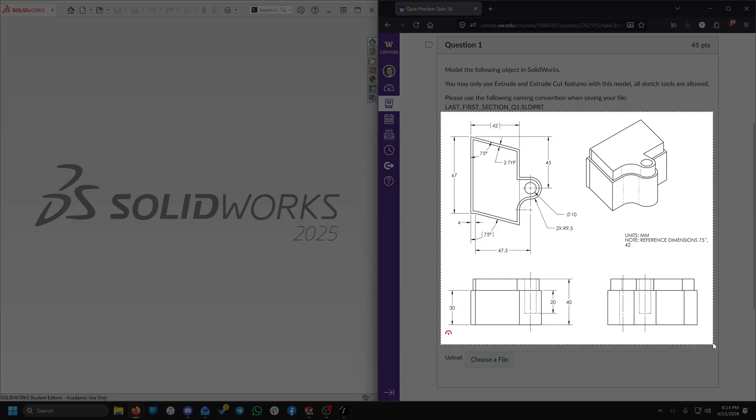And as far as the actual quiz itself goes, when y'all are taking it, it's going to be handed out on a paper sheet, so you'll be able to just do crossings there. However, so that everything remains on the screen, I'm just going to use the snip tool so that we've got our little doodle space as well. Oop, that is a bit much. There we go. Awesome. We'll probably use the highlighters, you can still read it.

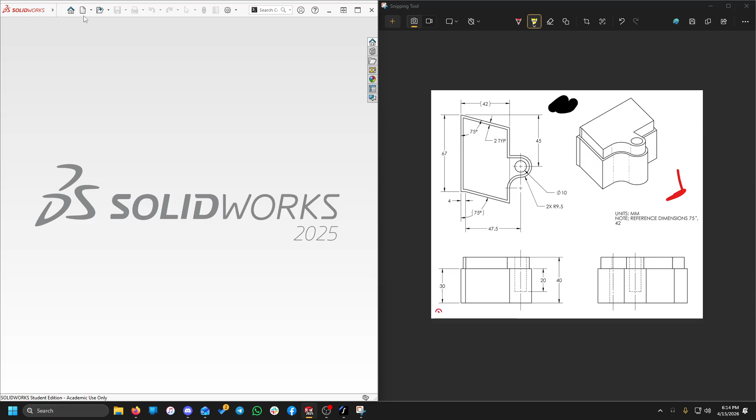But anyway, when you first get set up in the classroom for the quiz, I recommend you get SOLIDWORKS open, get a new file open, and then we have our units set. So on the front of the quiz handout, there's going to be a little thing specifying the units. It's either going to be inches or millimeters, and we can set that with the little drop-up menu down at the bottom right. This one is in millimeters, so mm. Cool. Alright, so got our file, got our drawing.

Let's see. Usually, a good place to start is to consider what feature we might want to do first. So anything that's got a majority of the geometry going on is generally a good spot. See in the top view, that's where we've got a lot of our dimensions, and they describe the profile of this base feature that we have here. So we've got some outer extrude that's taking up the majority of our space, and then we've got an offset inner extrude and an extrude cut for this little circular hole here on the right side.

So we're probably going to want to create this starting on the top plane. We'll draw the outer outline of it first, create our extrude. Then we can do an offset entities to get this inner loop, similar to the easier method for approaching a similar shape on the first homework assignment. And then we are going to do the extrude cut last, because we see this hole goes through both of these stacks of material.

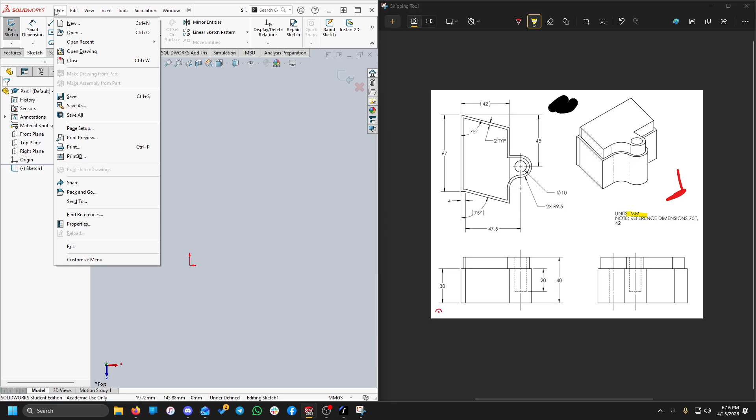So, beginning by creating ourselves a new sketch. This one's going to be on the top plane to make sure that our orientation matches. And as far as origin locations, there isn't really any specific point that would benefit from having the origin there, so we'll just have it in the bottom left. Makes sense. And start by drawing in our outline. So we've got a vertical straight line. Then we've got a little diagonal going down to the right. Then another vertical over here. Horizontal to go over. Then we've got this tangent arc, so it connects in smoothly on that side.

So we can do the auto transition feature by bringing the cursor back to where we started that line, and then tracing out a little bit of a circle, and then clicking down here. And then we see we've got another arc, so it connects in smoothly from there to there, and we do see that we've got these gray tangent edges in our isometric, indicating that those do in fact have a nice smooth connection between the geometries.

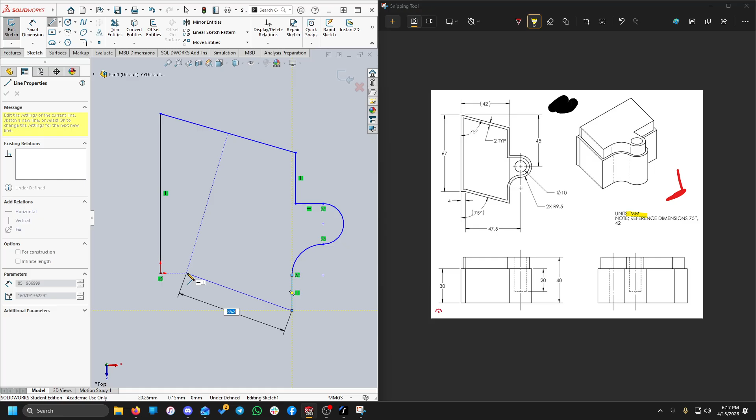And then we've got our final arc here. Little vertical line segment down there. Another diagonal. Looks like that brings us close to the beginning, but not quite. And then a horizontal to close it off. So we've got now a fully closed shape. So all's good so far.

And then we just need to throw some numbers at it. So looking this one over, we see that we've got 67 units on the left side, so we'll dimension this one there. Then we've got cross that out. I guess also because it's going to bug me if I don't.

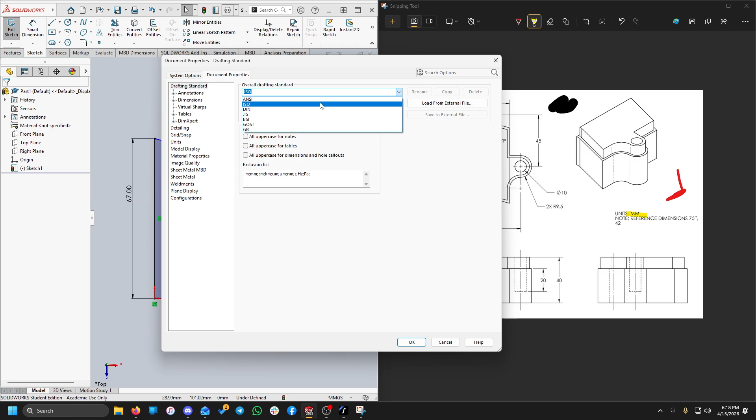We can change this from the ISO drafting standard to the ANSI drafting standard. So this is through the little options gear up in the top. Under document properties, for whatever reason, the default ANSI in SOLIDWORKS 2025 is set to the ISO perspective for this. So if we change it to ISO and then change it back to ANSI, that fixes it. I don't know why, but we're just going to go with it.

Anyway, we've got our 42 dimension up here, but this one's in parentheses, so that tells us that this dimension is a reference dimension, so we can't use it directly. We're just going to have to hope that as we hit the rest of our dimensions, everything kind of comes together. So, from there, got this 75-degree angle. So we can measure an angle just by selecting two non-parallel lines, and it'll allow us to get the angle between them.

Then we've got 45 units from the top corner of our object down to the center of our arc. So that's going to be from that point to that point. And we want to make sure that we're being very careful that we're measuring the height here, not the distance. So it's explicitly from there vertical. 45.

Cross that one off. Then we've got a 2x R9.5 indicating these two arcs. So with those, we know one of them needs to be dimensioned, so we'll dimension this top one first, 9.5, and then the 2x tells us that there's another arc that uses that same dimension. So that's probably going to be this one that is connected with over here, since that's the only other sort of arc in the area. Another potential thought could be that it would be this one on the inner loop, but that isn't really something that we would be able to use here. So it's going to need to be this outer one.

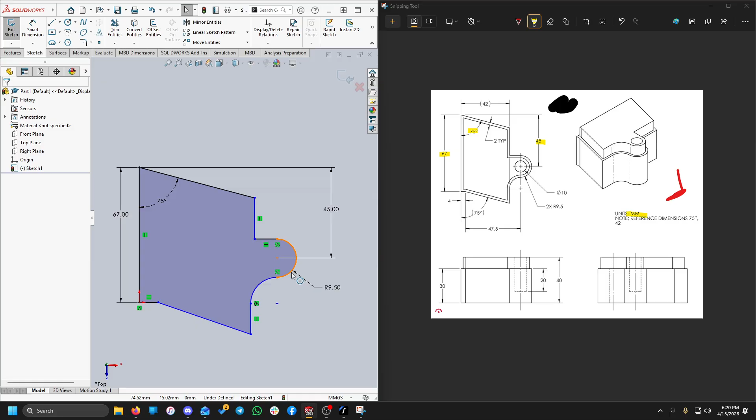And to get it so that this one dimension is affecting both of these arcs, we're going to need to use the equals relation. So we can select the one, hold down shift, select the other, and equals. You might need to hit escape a few times when you're first doing that, depending on if you had any other tools selected, but that does get that set up for us.

2x 9.5. Another thing that we can notice while we're here is that the center marks for these two arcs are vertically aligned with each other in the drawing. So we've got one of the extension lines actually connects between the two. So I'll just grab those 2 points in the middle, apply a vertical, and that sort of sets those up to match up nicely.

Another thing that we can notice regarding our geometric relations is that we have a little guideline showing us that this top vertical edge stays lined up with the bottom vertical edge. So these two lines are going to need to be collinear with each other. Same song and dance as before, hold down shift, select the both, and we can apply a collinear relation.

Cool. Then we've got our 47.5, specifying the distance from this little shoulder to the center mark there. So smart dimension from that point to that point, 47.5, there we go. And then the last dimension that we've got for this outer loop is this 4. So with our smart dimension tool, define that distance as 4 units. And that looks like that's got it.

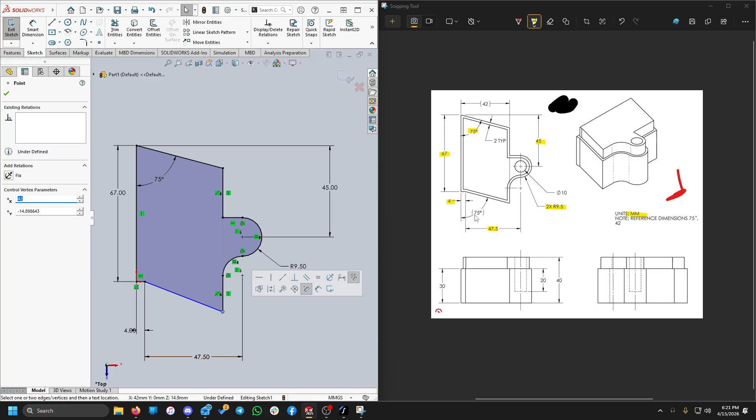We are still a little underdefined, but we do have another reference dimension that can help us out here. So this one's telling us that this diagonal down here is also at a 75-degree angle. But since it's in parentheses, we can't use it directly. But we have another 75 up here. So we just set a parallel relation between our two diagonals.

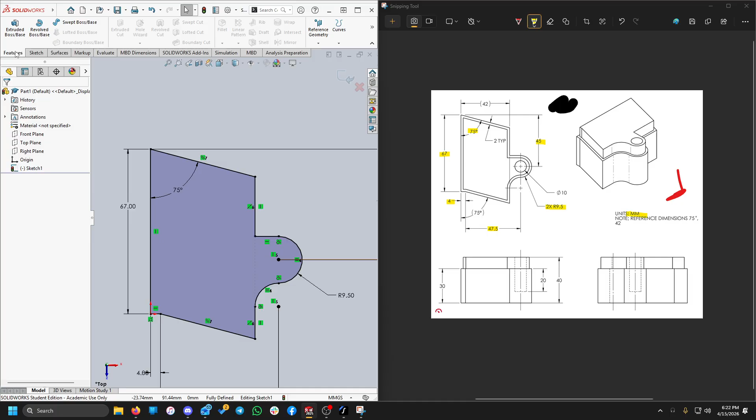Okay, I can't be sneaky about that. There we go. If we select both of our lines, apply a parallel relation, that then gets our sketch fully defined. So then we can do an extrude up 30 units. So we'll pop out of features, extrude boss base. This one is 30 units. Check mark.

Cool. So that gives us our first feature down. Then we've got this little offset or inset bit where we see this one goes 40 units from the bottom of our object up to the top. So for that, what we could do is we could do the sketch here on this top surface, extrude up to some offset of 40 units from the bottom, or make our lives a little bit easier with the feature, we can actually do the sketch on the bottom face of our object and extrude through all of the existing material. So we'll select that bottom surface, new sketch, do an offset entities.

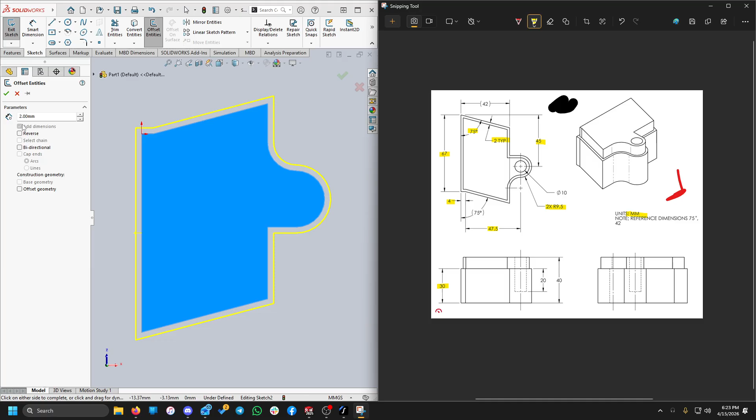This one, our offset is 2 units, indicated by the 2 TYP up here. And then we can reverse it to set it so that it is offset inwards. Check mark. From there, features, extrude boss base. This one extrudes up 40 units. Flip our direction as needed, and that looks good.

Control 7, you want to do this usually after every feature or two to make sure that your orientation matches the orientation of the object that you're trying to model. So it's pretty much important for making sure that when we create our drawings, the orientation that we're working with ends up being consistent with a usable isometric and good front, top, and right views. Alrighty, so that was the 40.

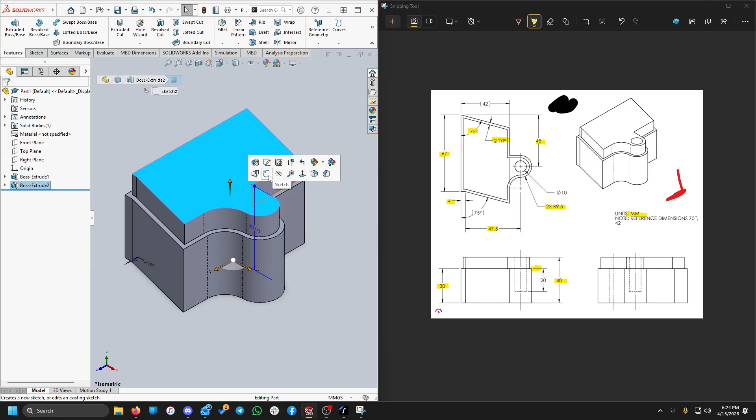Our last two dimensions that we've got are diameter 10 for that hole, and it goes to a 20 unit offset from the shoulder. So we'll create a new sketch on this top face. Circle. This one we've got centered in the same place as the previous one. We've only got the one center mark there and 3 arcs. So that tells us that all 3 of these need to share that same center point. So if we hover close to where the middle of it should be, then it'll pop up.

Otherwise, if we just draw the circle out in the void, we can then grab the edge, hold down Shift, grab the other edge, and apply a concentric relation manually to sort of snap these to be nested within each other. Then we can use our Smart Dimension tool to define this as having a diameter of 10 units. And then Features, Extrude Cut. This one, we want it so that it goes down 20 units from this shelf. So we can do offset from surface, that face, 20.

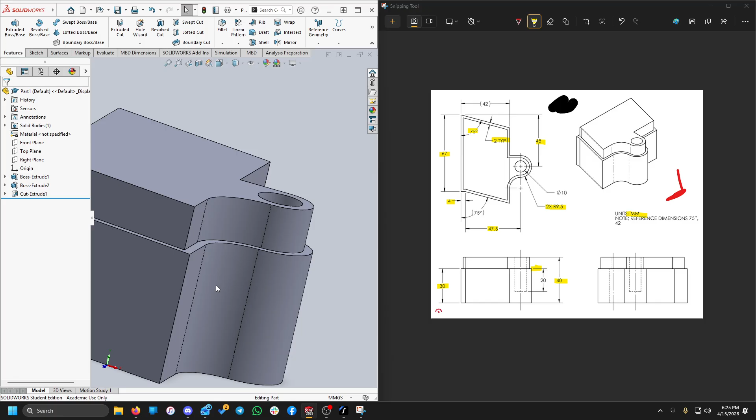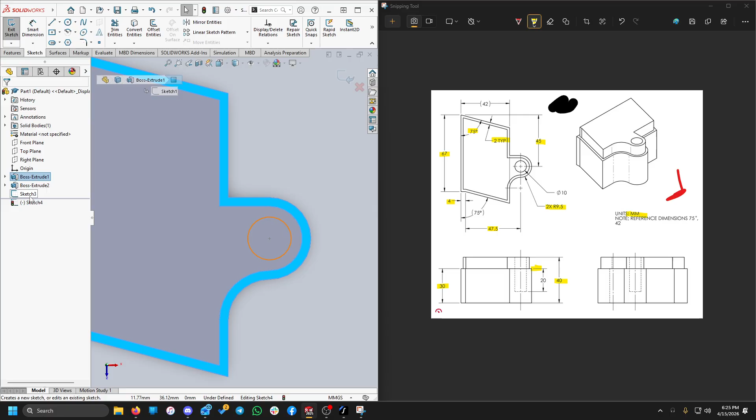Cool. So, another way that we could approach that one is if we did that sketch on the shelf, then we can do down 20 units as the blind end condition, and then we can choose direction 2 and set that to through all, so it goes up. So effectively, we can create a new sketch on the shoulder. Let's hide that previous one. Create our circle, center edge, circle, concentric. This one is 10 unit diameter.

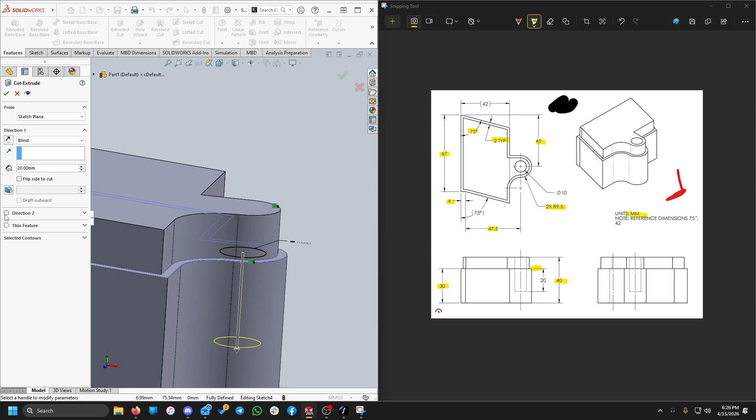Then extrude cut. It goes down, so blind, 20 units. And then we can set a direction 2 to go through all, so then it'll cut everything above it. So, slightly different way to approach the same thing. There's usually an arbitrarily high number of methods that are equally valid. Some of them a bit more elegant or a bit faster than others, but as long as we're following best practices, they're all equivalent. So, that wraps up, or I guess Control 7. Yep, looks like what we're going for.